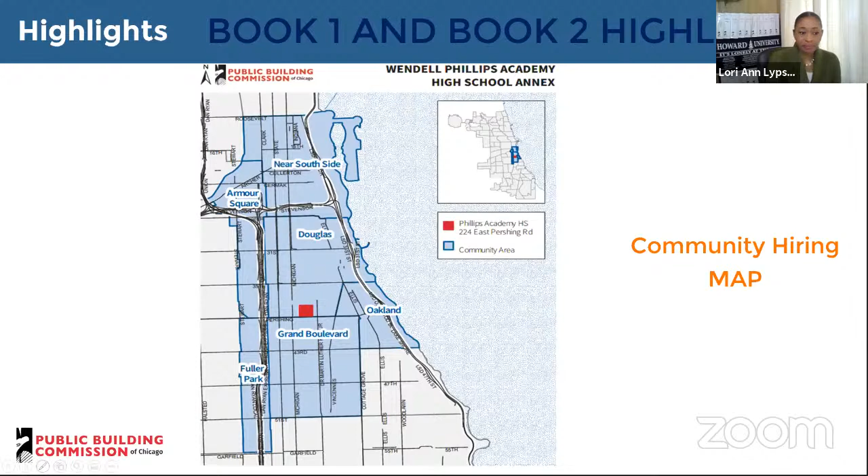Again, this is the bid form. Patty, why don't you go over it?

Certainly, Lori, I apologize, I was on mute.

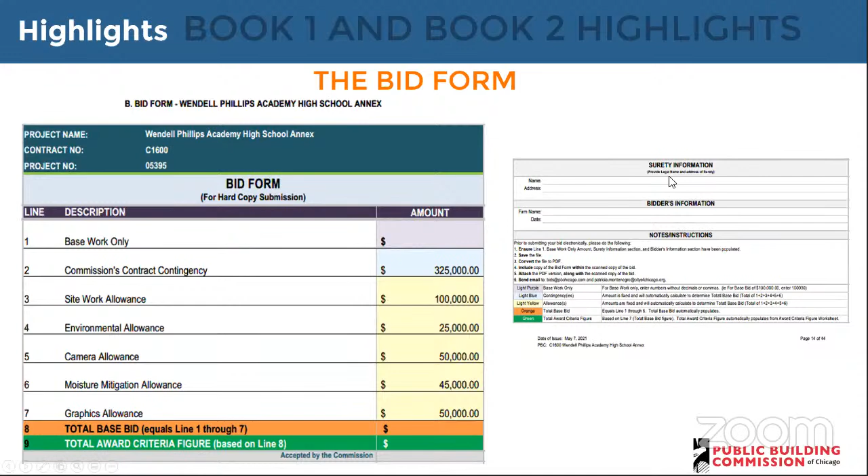Book 1 contains the bid form. Essentially the bidders will populate the area shaded in purple with the base work only, and then the contingency and allowances are automatically populated. Those will be part of your calculation on the total base bid line, which, if you're using the electronic Excel sheet, will automatically populate into the orange space. Then when you do the award criteria sheet, your award criteria figure will populate into the green space. Please ensure you complete the surety information and bidder's information located below. For screen purposes we split the bid form in two, but it's one complete document, so bidders should populate the purple and the surety bidder's information.

Are you, Lori, ready to go back? I'm back, I'm sorry, my allergies are intense.

We're going to base it on the lowest responsive bidder for the award criteria, so make sure of that. Make sure you fill out the light green sections, which is minority journey workers, apprentice, labor, same thing for female journey workers, apprentice and labor, and fill out your bidder information. For this project the goals are 28% MBE, 4% WBE. We want to emphasize that we want it to be a reflection of this community. We accept certifications from Cook County and the City of Chicago.

We're going to go over the MBE and WBE. Make sure you fill out a Schedule D, and with your Schedule D form you're going to put all the firms that are part of your M and WBE plan. Really take notice if you use suppliers or distributors and make sure you put the correct percentage for your teams. Make sure you have 28 and 4 - and again that is the minimum, not the maximum. Let's say you have a joint venture, you might have 70% participation, who knows, we want to make sure we fill that out.

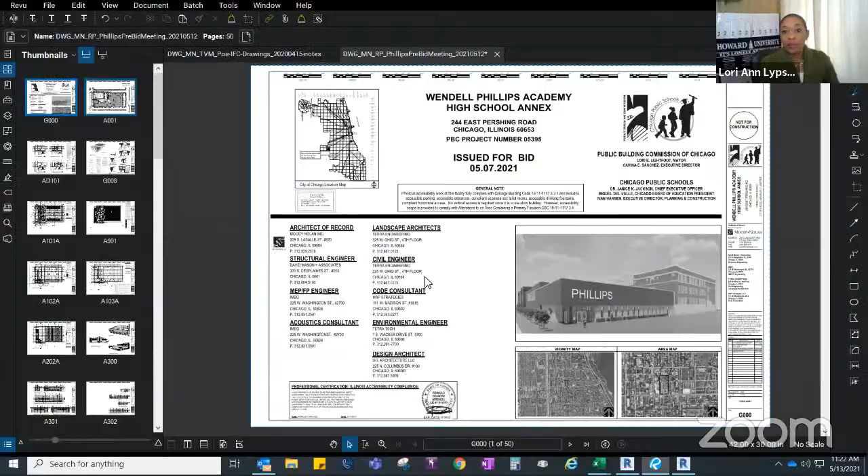I'm going to turn it over to Rachel from Moody Nolan. She's going to share her screen and go over some of the sheets we have in the drawings, and we have some of our subcontractors as well to go into additional details. So I'll turn it over to Rachel.

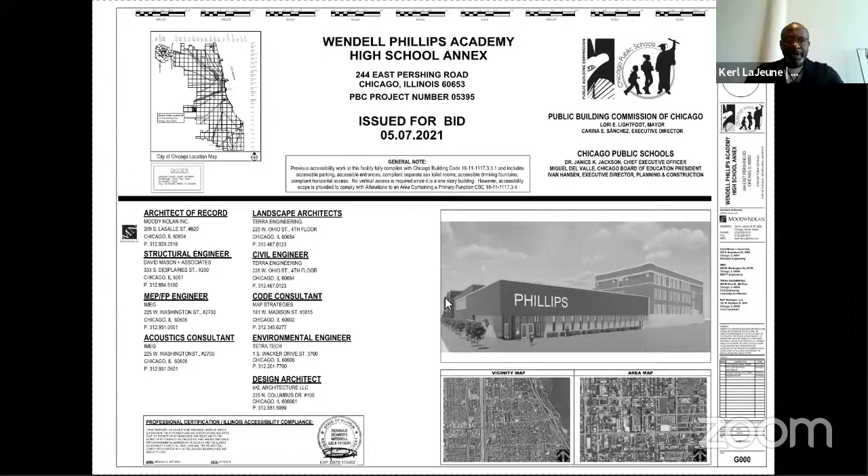Hello. Rachel Cooper here, hopefully everyone can hear me okay. Yes, better than me. Yes. Okay great, I'm just going to run as quickly as possible through the drawings.

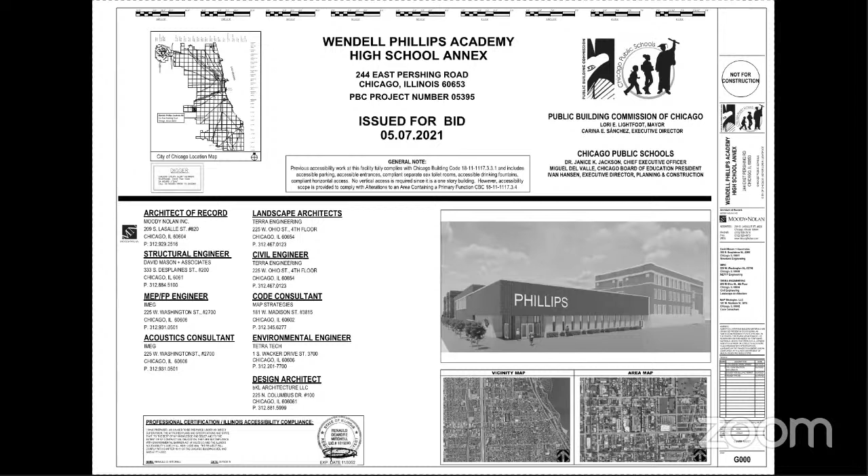Welcome to the pre-bid for Wendell Phillips Academy High School Annex. Starting with the site plan: this site is located at the existing Wendell Phillips Historic High School location, on East Pershing Road and Giles Avenue. The current existing building is 3 stories. The new building shown to the top left of your screen is our annex - it will be a 2-story gymnasium with a Hall of Fame entrance, totaling 21,260 square feet.

We'll provide 51 new parking spaces. A transformer is already located on the site, and we will add a fence. There's also an existing masonry trash enclosure that will have a chain link enclosure around an existing compactor. There will also be new paving to access the parking lot and a couple of curb cuts for entries - we'll get more into that on the landscape plan.

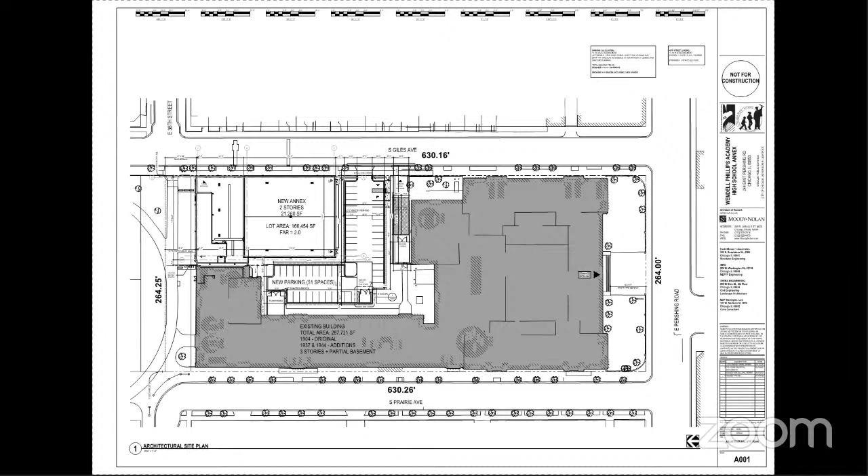Demolition. The first detail on this sheet identifies a new opening created in the wall for connection from the existing building to the new building. Starting at the existing basement level to the first floor plan, these are not in direct plane—there's a 2'9" separation from grade level of the existing basement to the first floor of the new addition. So there's demo to provide a door and access to a vestibule that will lead to stairs that get you up to our level.

Moving around, going up to the second level, we'll be removing an existing window and lowering that opening to the ground level of our second floor, to put in a door to connect you to that second floor space. The second floor space is just an ADA accessible vestibule to access an RTU well that we'll also be putting in.

Moving up to the third floor, and also the roof, we'll be infilling the existing openings. There are 2 windows there. We'll be infilling those to complete a 4-hour separation between the existing building and the new.

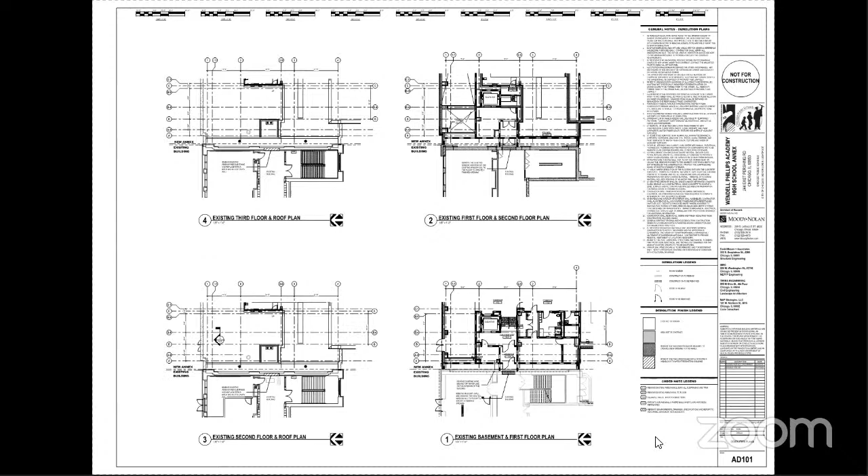Detail 8 simply indicates this darker area, which shows the 4-hour fireproofing and structure that creates that 4-hour separation and demising partition between the existing building and the new building. The rest of the building is unprotected, non-combustible construction.

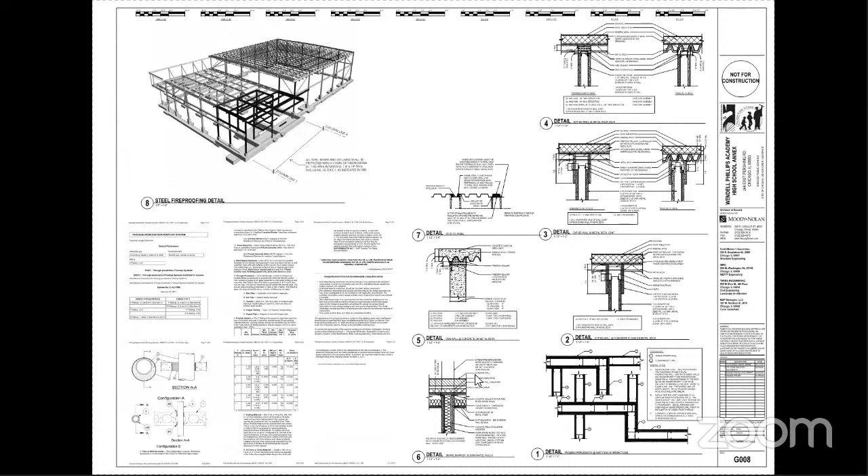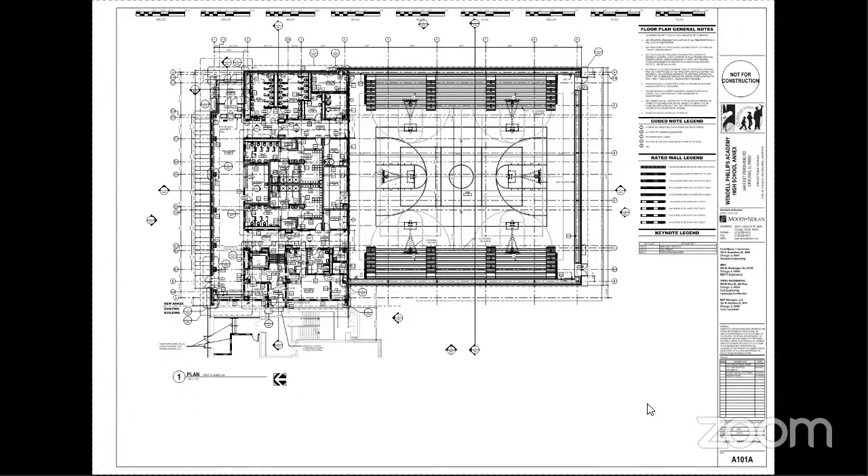Looking at the finish plan, we are planning to have VCT in that Hall of Fame space. The locker room will be comprised of epoxy flooring and ceramic tile in showers and toilet rooms, and also at the back walls for water fountains. The basketball court will be wood sports flooring, and the main entry off of Giles will contain walk-off carpet permanently installed.

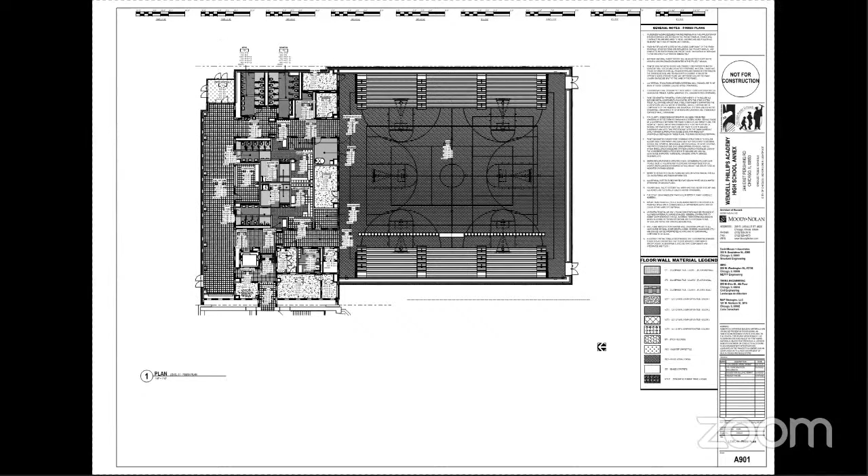Moving to the second floor plan, on this level we have an RTU well that will service the gymnasium as well as the Hall of Fame space and the support space. This center chase will take in the HVAC and distribute it to both the gymnasium and the other areas, and is accessible via this connected link from the existing building to the ADA vestibule, also with an elevator. Again noting that 2'9" elevation change, we have an elevator put in so that there's access to this rooftop level.

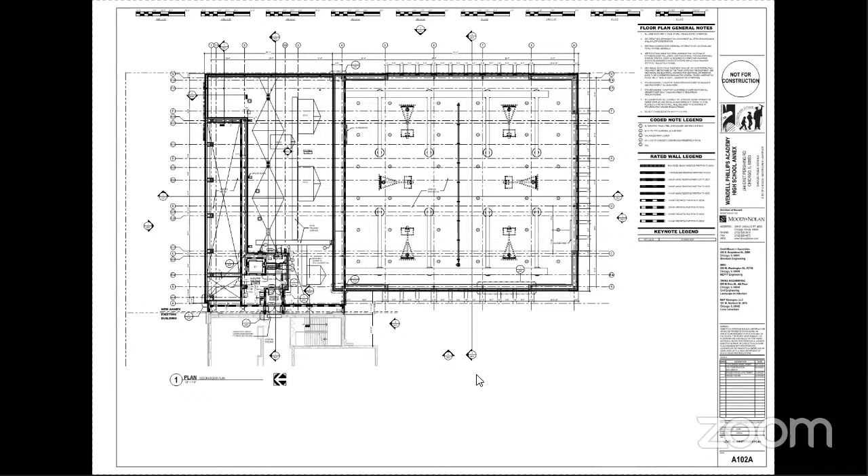Getting into the roof plan, this will be a modified bit roof system. The roof over the Hall of Fame is sloped to the interior, where the RTU well will have a gutter and downspouts. There are roof gutters located throughout that service the rest of the space.

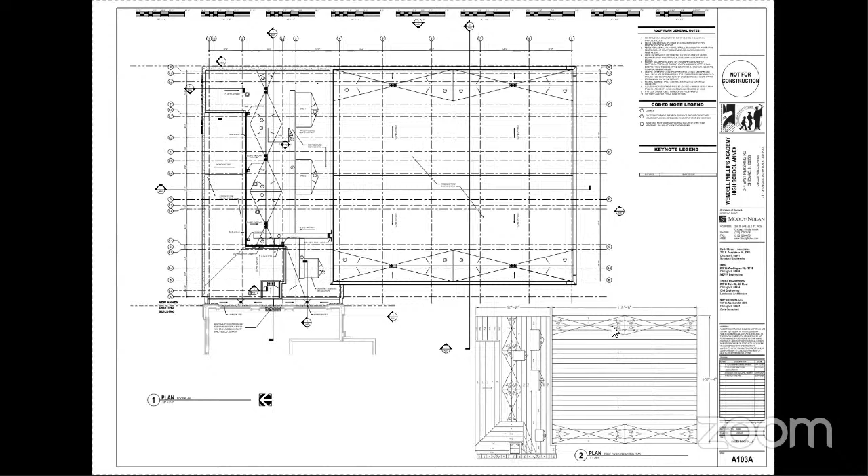This is the reflected ceiling plan for the second floor. The gymnasium metal deck is acoustical metal deck. The divider curtain is located in the middle between structure. There are 6 basketball courts, or 6 basketball goals. This entire space will be painted white. There are acoustical baffles in the Hall of Fame, along with specialty pendant lighting.

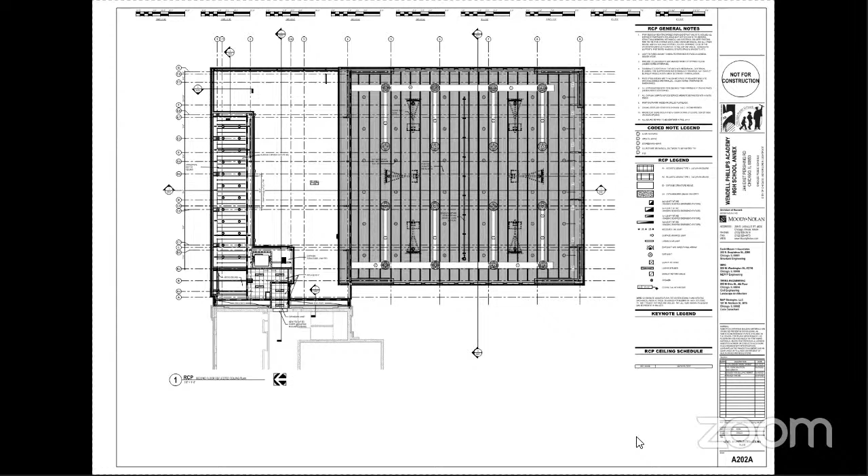Perspective views of the gymnasium annex. Starting at the 3rd view, this is the southeast view of the gymnasium. There was much thought given to the landmark requirements. This project is located on a historic site, so we've gone through the landmarks review, and based on comments have updated the elevations to meet landmarks. That includes banding that ties in with the existing building, and also different reveals and vertical placement of windows with interior elements that point back to the existing school building.

The school has stone banding going around, limestone, and also has a mix of limestone and brick around the full extent of the building.

There are no window guards in the gymnasium. That will be all laminated glazing, both at grade and at the gymnasium clerestory.

Over on the second perspective, you can see the profile of the existing building. There is an expansion joint that will follow the brick and limestone of the existing building all the way up. That is necessary to keep. Also note there is a 16-inch step back going around the building from that limestone to the brick.

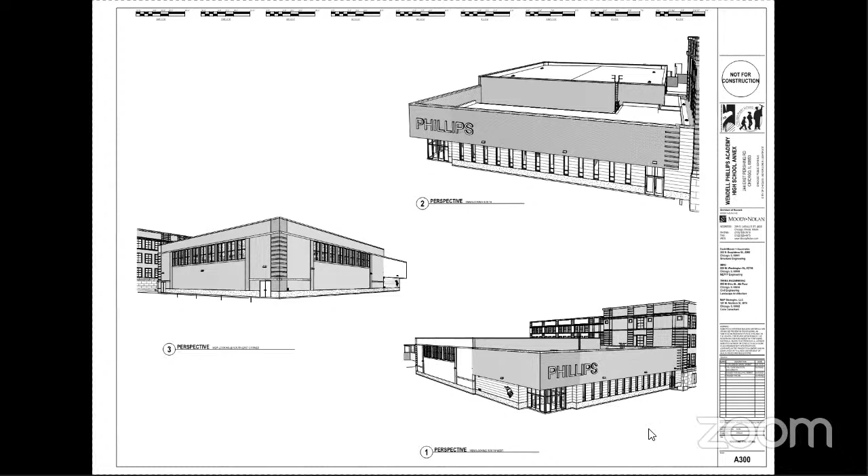Looking at the elevations, again there are clerestory windows at the gym. These will be laminated tempered windows. The lettering at the front of the annex is extruded halo lit lighting, so it will require power and lighting. There is a wildcat logo on the elevation that will be cut into stone.

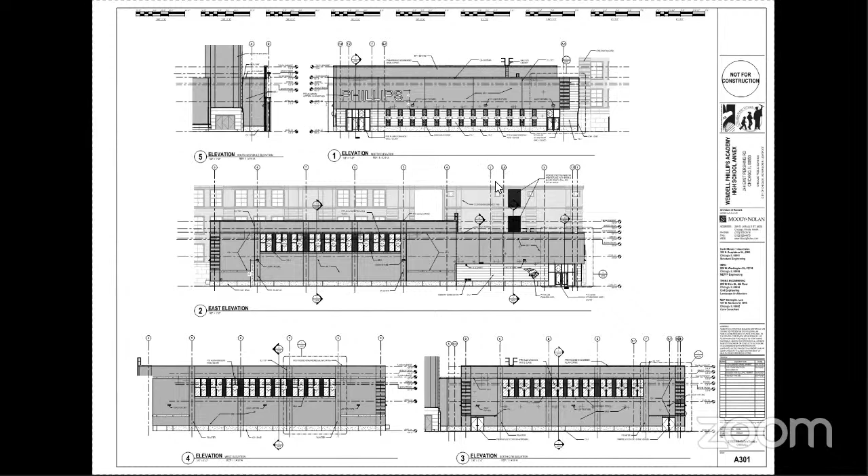Existing differences between the height of the existing building and the new building have been surveyed and incorporated into the contract documents already.

Looking at A302, this is just a view of the second level RTU well. The northeast and west elevations are clad in corrugated metal, and the south wall is the north wall of the gymnasium, which is brick.

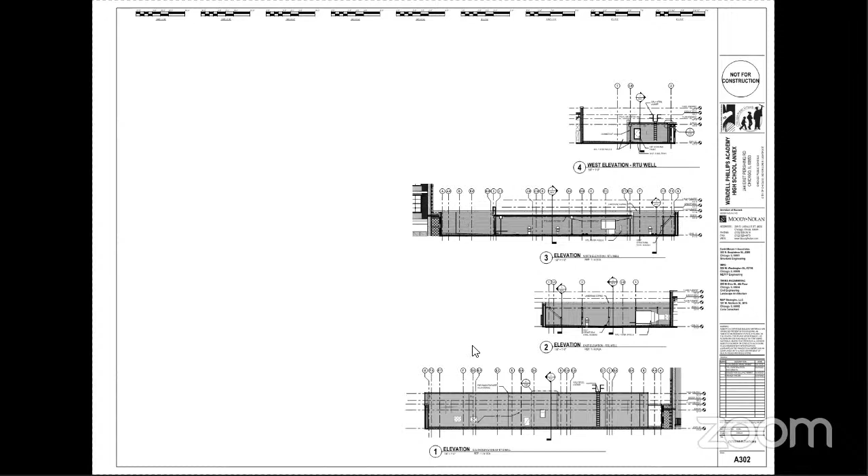So we're looking at sections that take you through the gymnasium primarily, noting that from the gymnasium space over to the support space, there is a drop to get to that RTU well. So we're going from a 2-story to basically a 1-story with that support on top.

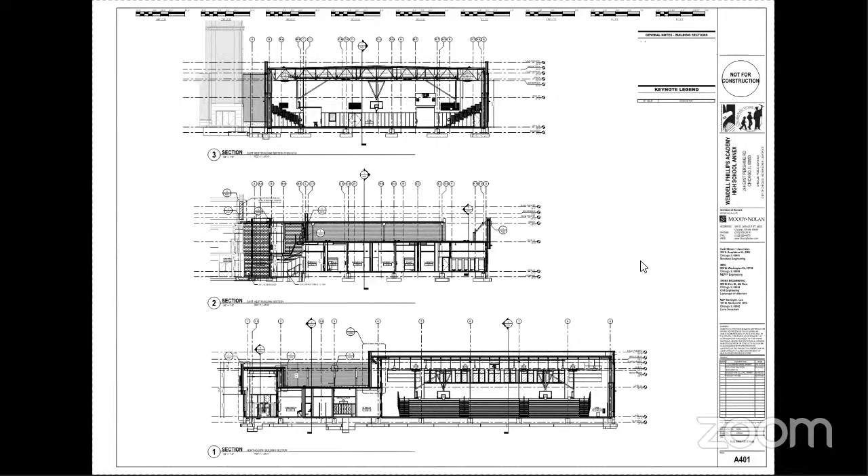Again, pointing out the need for the accessible elevator from the change in grade shown here. I know this is small, but just a quick guide through the drawings.

Looking further at a section through the clerestory windows, we've got structure buried in the wall, cross bracing that will miss the window openings. There are 2 brick colors represented, a field color and a darker brick color, with typical pattern being common bond. Again, the windows here are laminated and also a frit glazing.

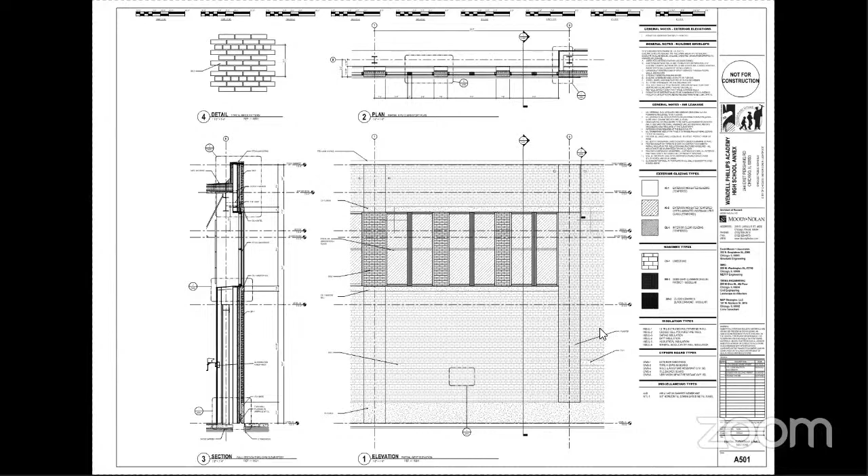At the side of the windows are pilasters that have a small relief on the corners. What we saw previously included pilasters, but not actual pilasters, just expansion joints indicating that separation.

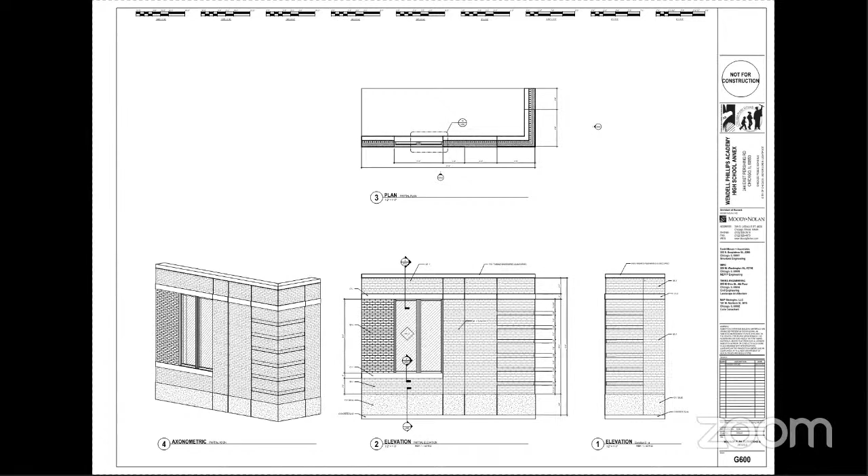We will require a mock-up to be completed. This mock-up is approximately 18 feet high, and 22 by 7 feet 4 inches on the ground on a concrete pad. This should include the corbelling as well as vertical and horizontal mullions in the window. This will need to be reviewed and approved by the architect, owner, and end user.

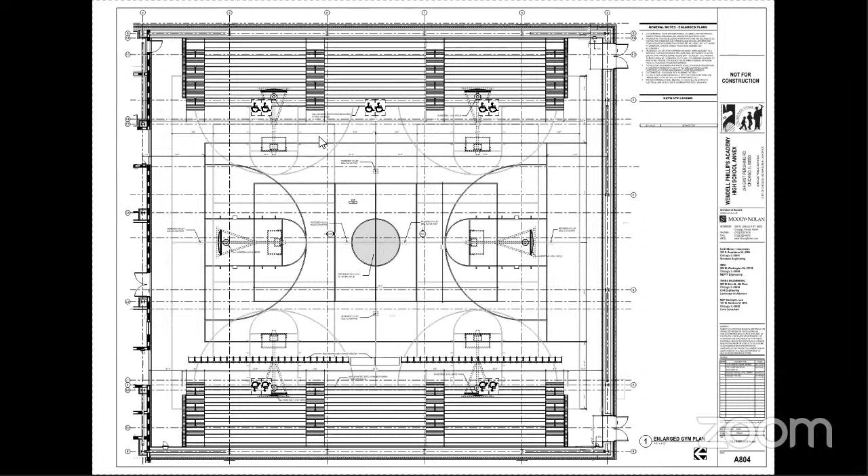The gymnasium will seat 850 spectators. We're providing attached retractable seating on the east and west sides of the gymnasium. We are planning for a custom logo to be painted at center court, and as defined before, there will be striping to indicate the different uses of the basketball court.

Going further into the section, there will be wall pads along the north and south sides of the gymnasium that are a custom size to go up to the top of the doors. There are scoreboards located both on the north and south face of the gymnasium.

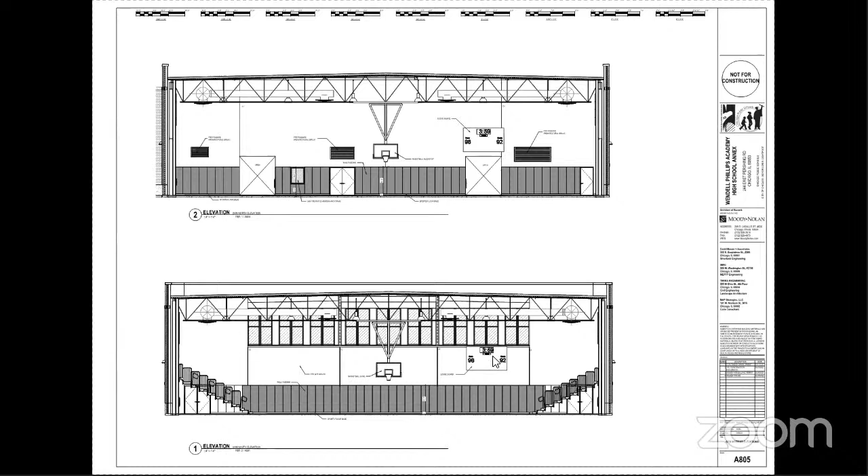East and west sides will also incorporate wood fiber acoustical panels on either ends of the windows.

Column surrounds will have perforated metal mesh and translucent acrylic panel for accenting. There is a trophy case located at the west end of the building that will be lit, a recessed lit trophy case. Again, VCT flooring throughout.

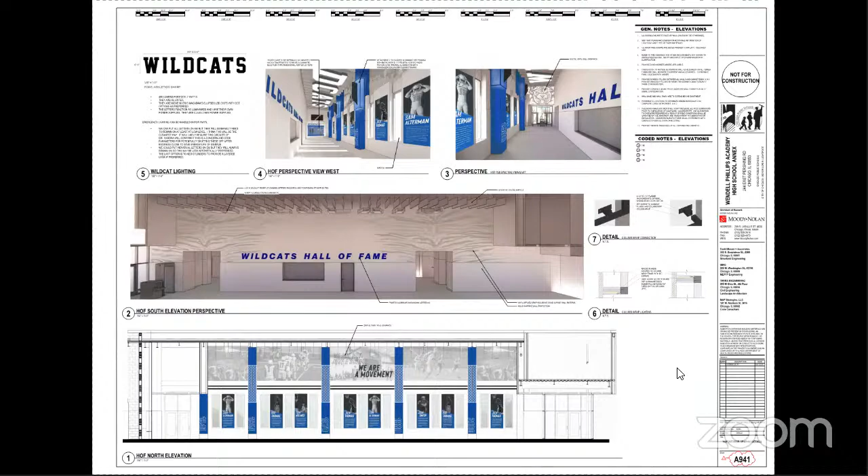Okay, and that completes architectural. Thanks, Rachel. This is Dustin Erickson with Terra Engineering. I'll go over some of the civil engineering elements, part of the bid package.

If you can advance to the next.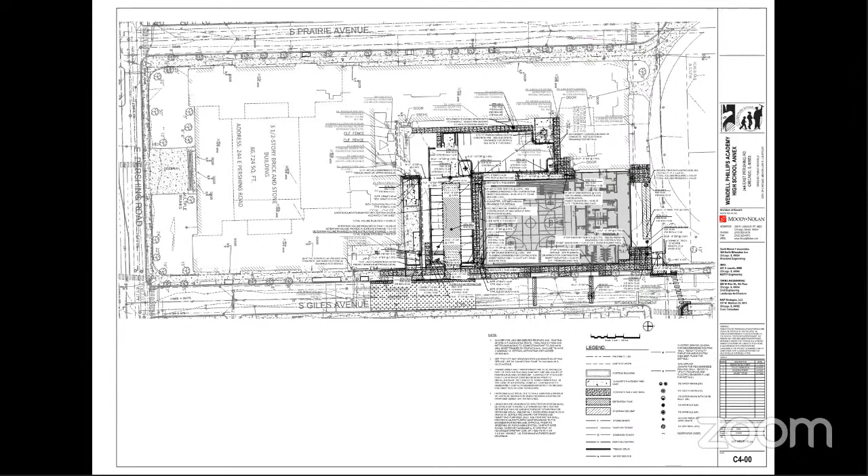All storm and sanitary connections are going to reuse existing combined sewer infrastructure on the property, so there will be no need for new utility cuts for storm, sanitary, or combined sewer in the public way. The only new utility cut needed in Giles is for the 8-inch combined fire protection and domestic water service. There will also be a new gas service that comes off of Giles, coordinated with People's Gas, and new ComEd service with conduits also coming from Giles, coordinated with ComEd. I think that's all for the civil improvements, Rachel.

And then I can go on to Steve for the landscape drawings. You might be muted, Steve. Rachel, if Steve's not on, I can give a quick overview of the landscape plan. Yeah, I don't see Steve. So if you can. Okay, thank you. Yeah, no problem, no problem.

I'll wing it. So the landscape improvements include some trees within the right of way along Giles Avenue. There will be a few new trees as required as part of the landscape ordinance, and some improvements in the right of way.

The project will also require an enclosure for the new garbage and trash area at the southwest corner of the parking lot. You can see there's a piece of concrete pavement within the parking lot intentional for garbage collection and pickup, and those garbage containers will be within an enclosure. To the south, the existing trash compactor will also be in a fenced enclosure to provide some screening to the parking lot and the school.

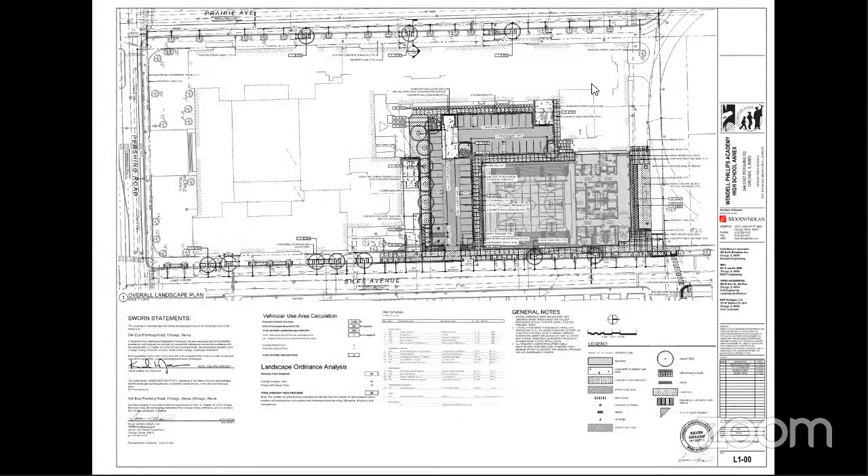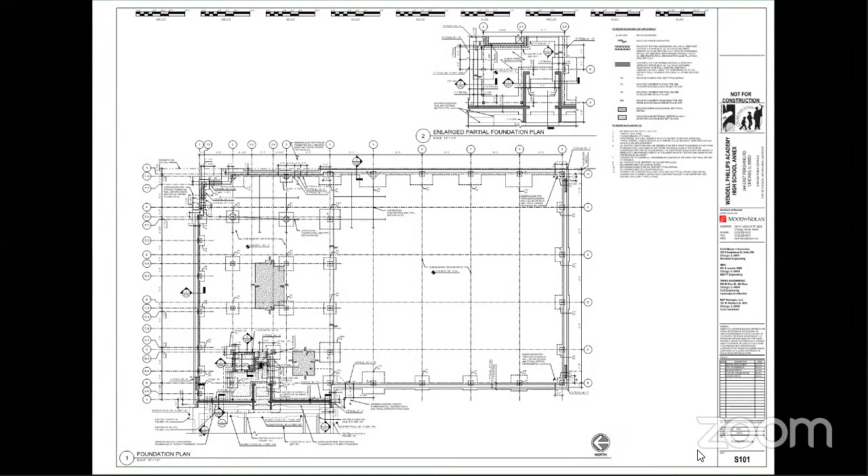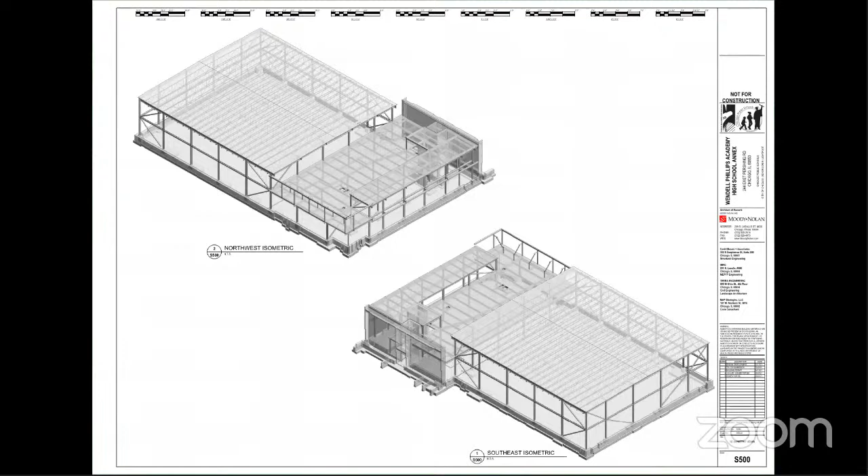The annex sits on a shallow foundation system. This slide shows the foundation plan. We have spread footings that majority bear 5 feet below the first floor. Some are slightly lower to accommodate things such as the elevator pit, existing foundations, and new utilities tying into the annex. There's unsuitable, uncontrolled fill at grade, so that's the main reason the geotech requires the spread footings to be slightly lower than you'd anticipate.

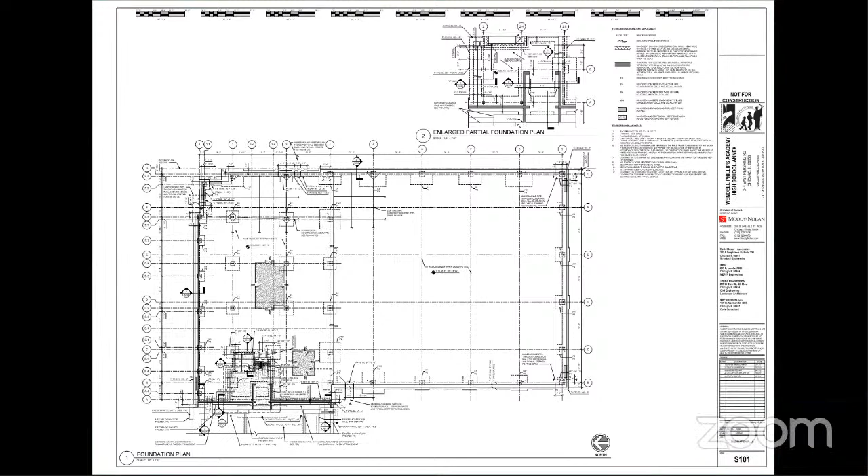Slab at grade also requires over-excavation and prepared subgrade. These requirements are in the bid documents. The next plan shows the second floor, or the low roof framing plan. As I mentioned, it's composite steel framing. Along the perimeter of the gym, you'll notice W-section wind girts to support the lateral load on the facade.

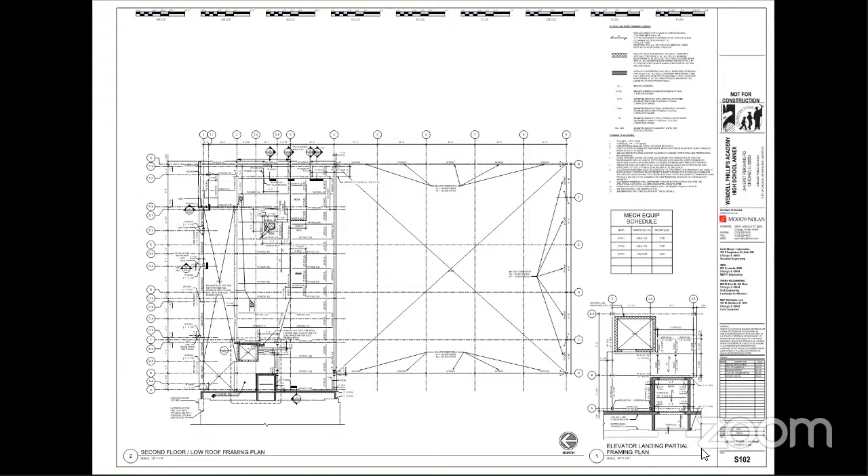On the next sheet, the high roof framing is similar to the low roof - composite steel framing. Then if you go to the next slide, you have the gym roof. It consists of long span joists spanning just over 100 feet, approximately 80 inches deep, at 5-foot centers.

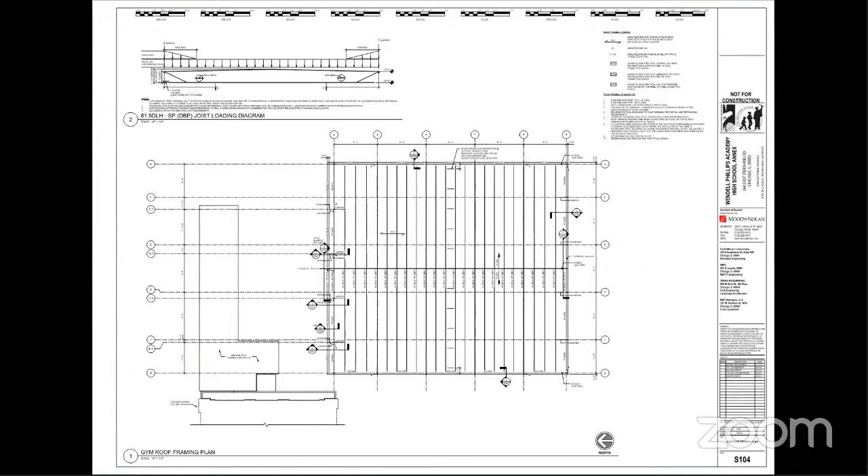The documents provide the basis of design and all the loading requirements and criteria, such as snow drift and attachments from below, such as basketball hoops, divider wall, etc. Depth is important to note here - we have supply ducts running perpendicular to the joist, so the depth of the joist is important because those ducts run in between the chords.

And then the last thing to note here is that we provided all the loading criteria and design criteria for the joist manufacturer to complete their design.

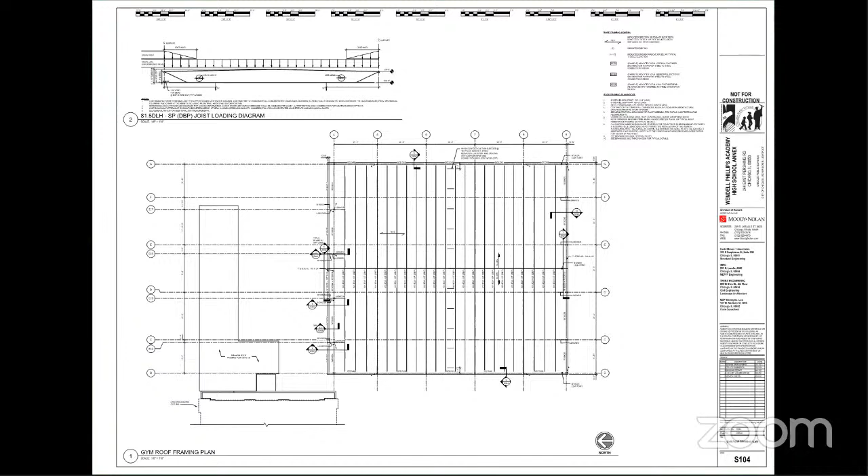The next sheet - we spent a good deal of time studying the existing school where we're abutting with the new annex and the vestibule. So these sheets provide detailed information required, elevations of new footings in relation to the existing, as well as locations and areas where we're tying in.

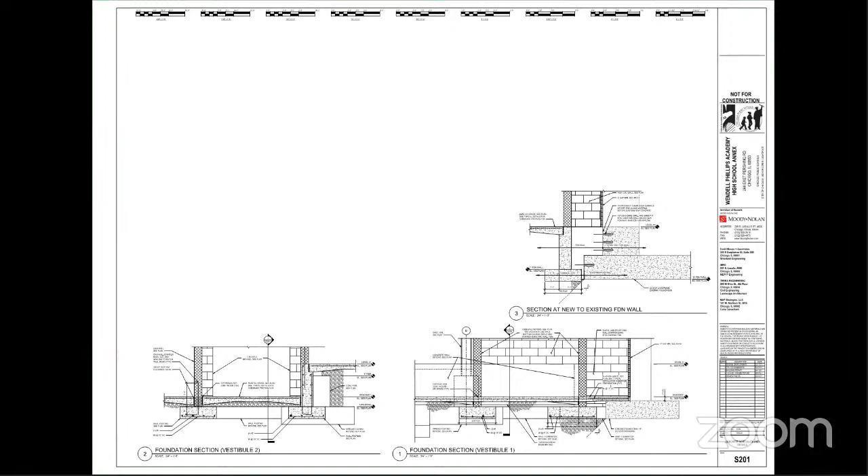The next sheet shows a couple of unique details for where we have brick overhangs on the north and east facades - we have hung lintels to support that brick. And I believe the last sheet here, I just wanted to note the RTU screen wall. It's approximately 12 feet tall, located in the northeast corner, with tube framing and some steel bracing back to the main roof structure. That's all I have for structural.

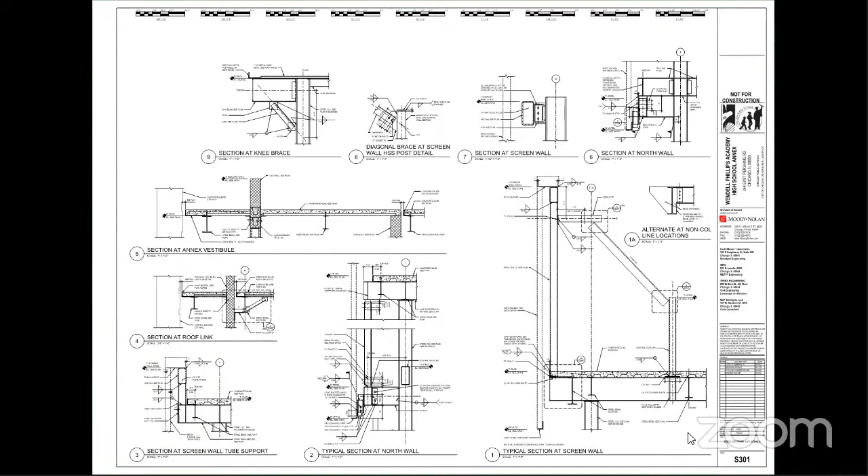Thank you. Lou? So Lou Hamilton with IMEG Engineers, MEP. This first drawing identifies one of the very few scope items that continues into the existing building.

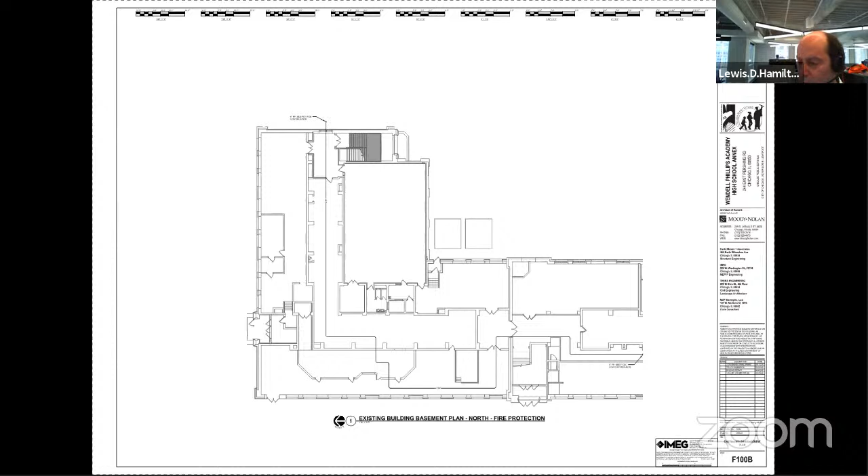The fire pump in the new annex is going to be interconnected with the existing building sprinkler system. This depicts the route of that pipe as it works its way through the existing building basement, and then the continuation as it gets all the way back to the existing fire pump location - a little diagram of how that interconnection gets made.

Once the new system is operational, the existing fire pump will be removed and the existing building system will be fed from the annex service. Otherwise, the fire protection system within the new annex will be standard, a fully sprinklered building, with the fire pump fed from the new 8-inch water service coming off Giles.

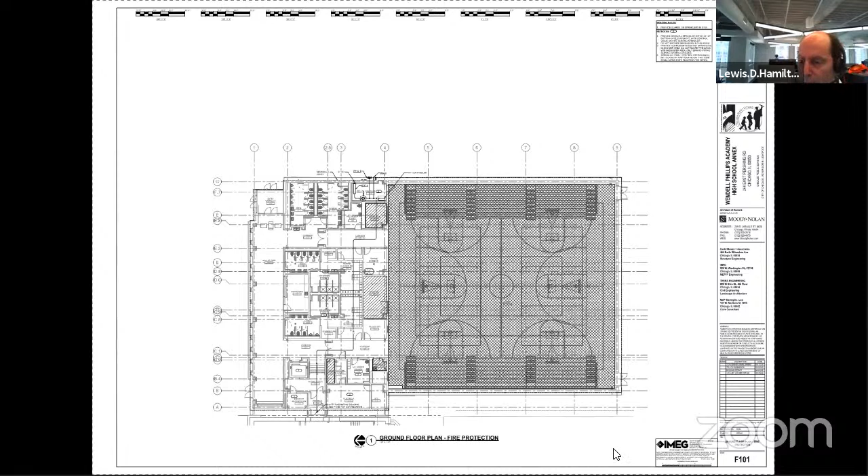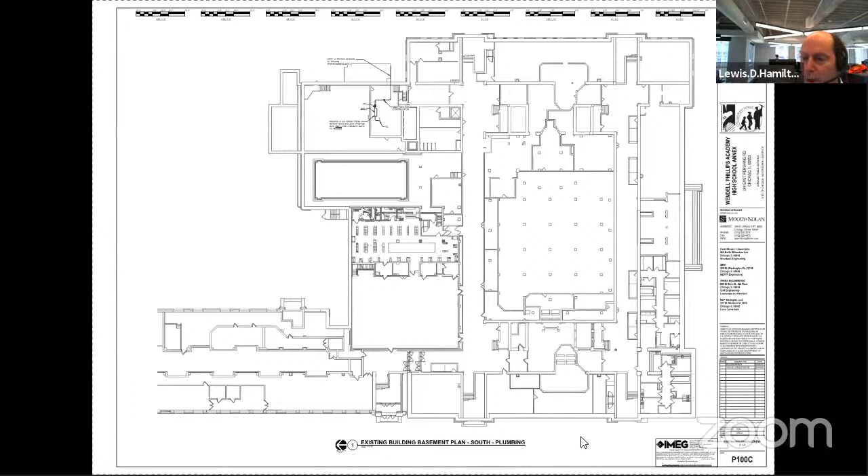This plan depicts another small item within the existing building, due to the new annex water service. The City Department of Water Management is requiring a backflow preventer, double check type, to be added at the existing building service, cut in downstream of the meter.

Everything else plumbing wise in the annex is pretty standard. Storm is routed to the detention tank, sanitary connected to site utility on the north. All the domestic cold and hot water originates from the new water service to the annex.

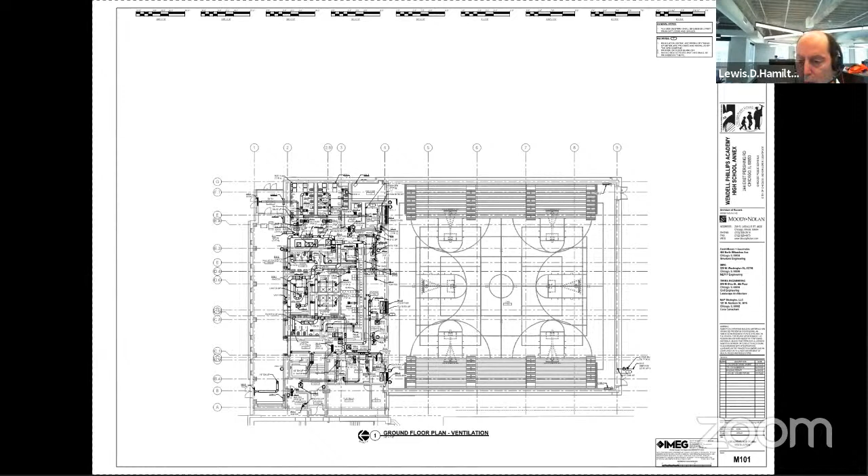Here, just depicting the rooftop units. Ductwork will come off the side of the units and utilize that chase to minimize the amount of ductwork exposed on the roof.

For electrical, there will be a new Commonwealth Edison service provided for the annex, originating on the east side of Giles. ComEd will bring that across the street, picked up on the west side of Giles, routed through the parking lot around the storm tank to a new transformer location in the corner of the parking lot, with secondaries going to the building switchgear and the fire pump.

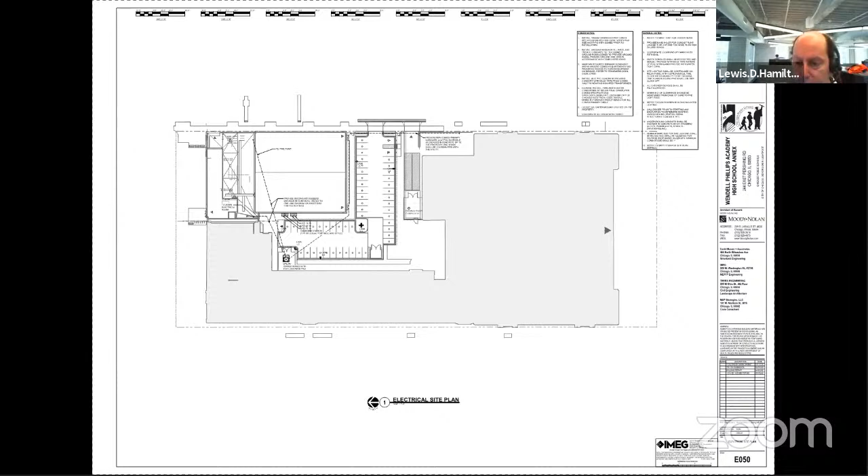Here's the enlarged plan of the electrical room and all the various devices within the spaces. There's a generous amount of power provided in the Hall of Fame space, for a lot of specialty lighting and hookups there. Otherwise, pretty standard scoreboard and provisions for scorers tables in the gym.

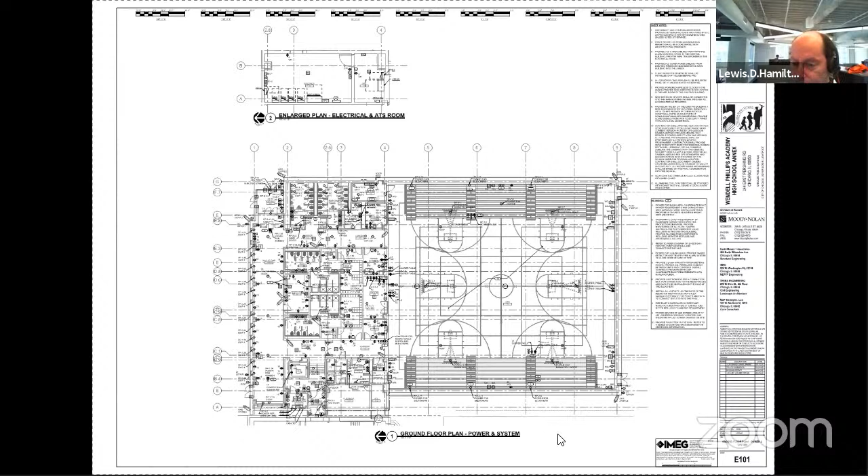Here, just the rooftop connections and the small area around the elevator. There is an emergency generator up on the roof, strictly to support the emergency lighting in the annex. It's a gas-powered generator.

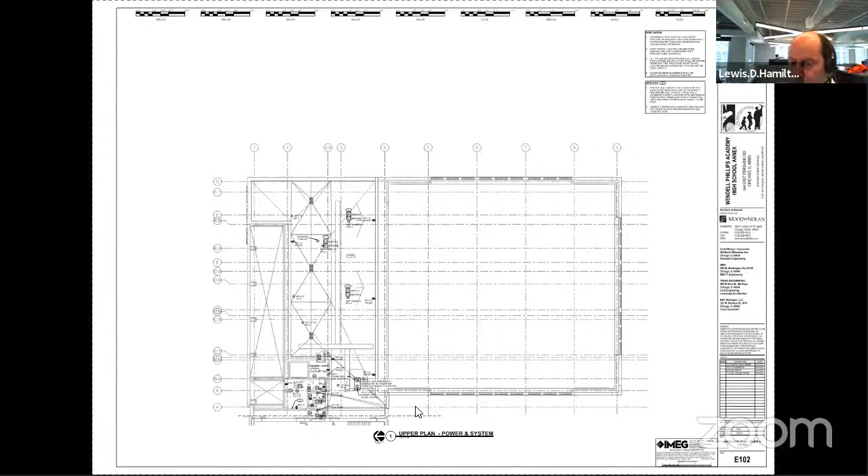Here's the lighting plan, pretty basic lighting for the locker rooms, toilet rooms, and support spaces. The lighting in the Hall of Fame will be further developed in an upcoming addendum, much higher end lighting than the remaining support spaces.

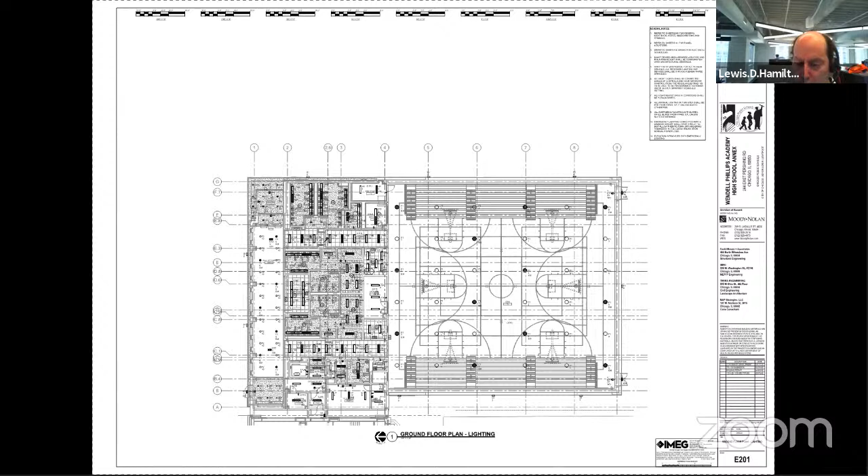And then the gymnasium has the suspended LED lights.

One line diagram, again showing the new electrical power service for the annex, no interconnection of the power between the annex and the main building, and then the small generator for the annex only.

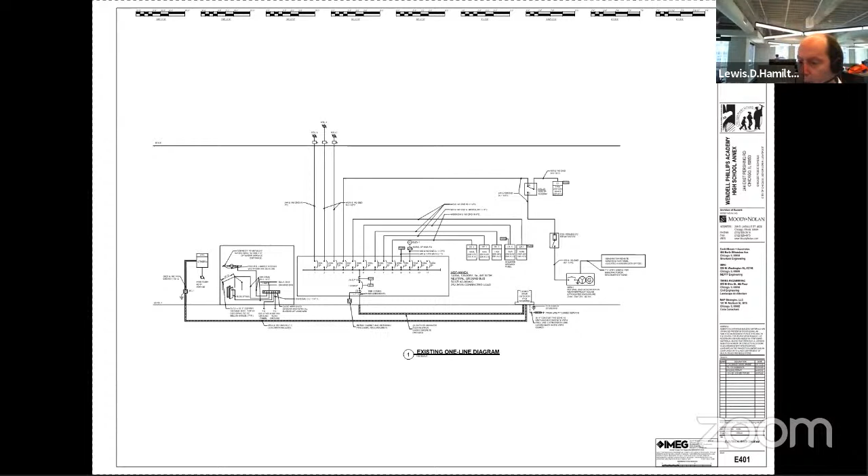The fire alarm system will be an extension of the system in the main building, as will the intercom system and teledata systems. There is a separate project being run by CPS to replace the fire alarm system in the existing building.

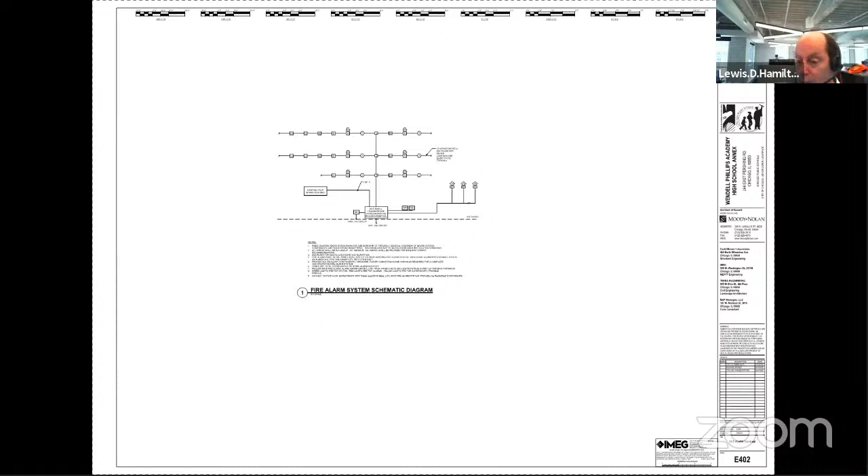So there will be some coordination between that project and this one. Fortunately, the design team, Moody Nolan and IMEG, are also handling that project, so the documents will be well coordinated.

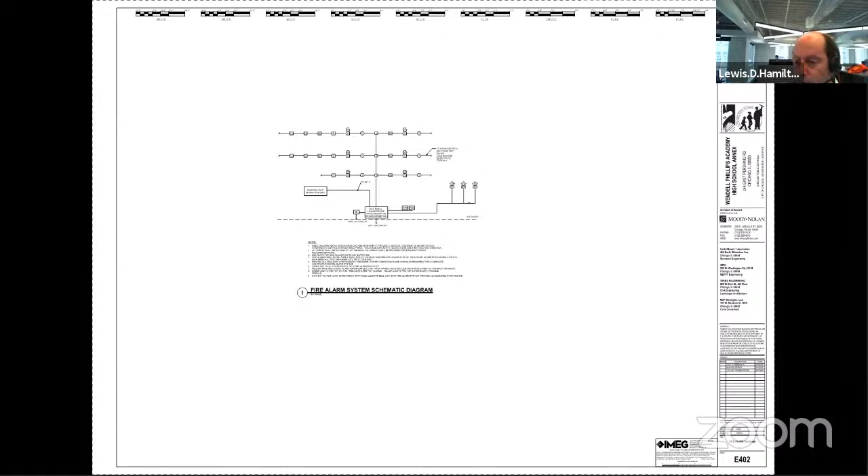And there is a sound system for the gymnasium depicted here. Here, also, again, just the sound system.

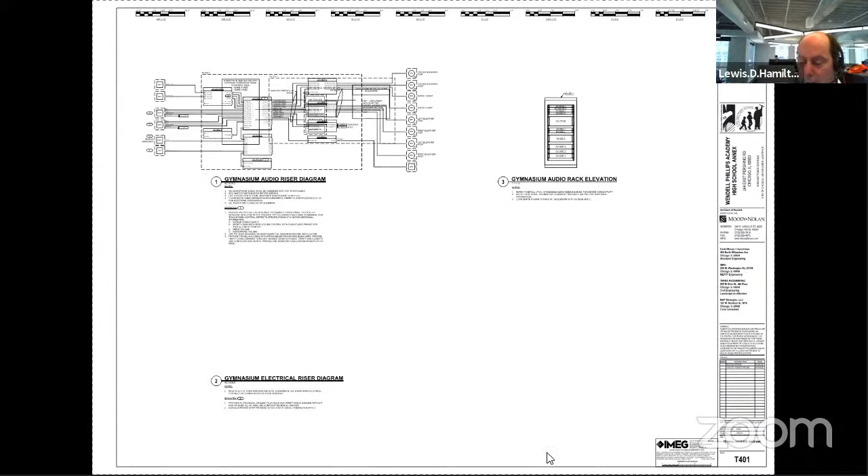That concludes the design team walkthrough.

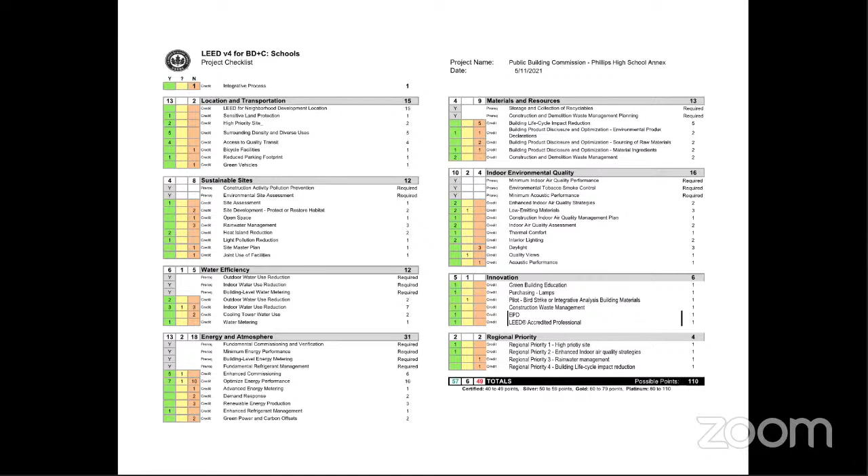All right, thank you Lori, Randy, and Cal. Renald, you and your team at Moody Nolan, great job. Ivan and Brian, your team, thank you for the collaboration. As Randy and Cal stated earlier, we have a very engaged and excited school community - students, stakeholders, and principal. It's been a lot of fun working with the team, CPS, the school, and the stakeholders, so there's a lot of excitement surrounding the school. Our confidence in this project is pretty high, and we're excited to get through the procurement phase and start work. Thank you, Cal, Randy, Lori.

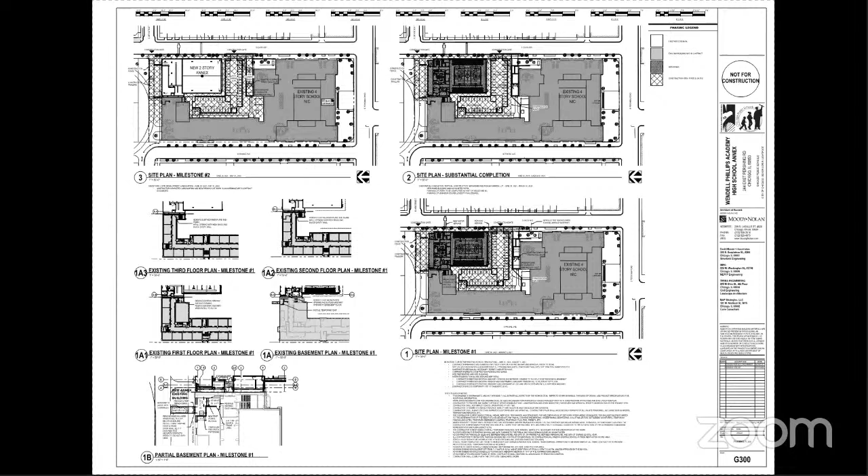So we have a question in the chat: will the project seek LEED certification? I provided a response - yes, the project will seek a LEED version 4 silver certification. Are there any more questions in the chat?